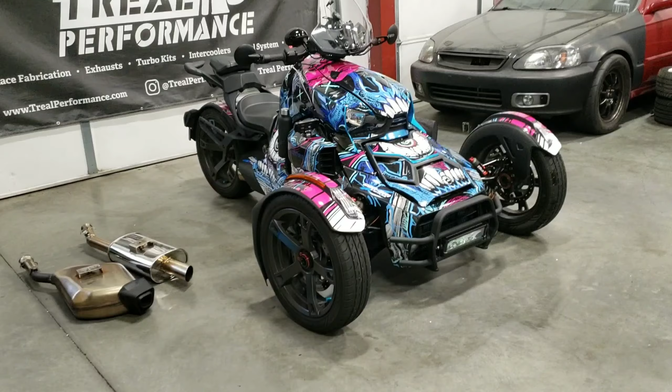We are here with the Can-Am Ryker, and we have test results for the exhaust and intake system. I'll let Joe talk about the dyno results and what all we had to do to get it on the dyno.

Hey guys, so these things were quite a bit of work to get on the dyno, to figure out how to actually make power with it, because the way the factory ECU works, it has a lot of traction control and ABS, so as soon as you would put it on a roller, even with it being in sport mode with the traction control off, it would still freak out and throw codes and go into limp mode. We had to do quite a bit to get that worked out and figure out how to get around that. We spent almost 2 weeks straight trying to get it figured out. Finally got it figured out by having the computer hooked up with the BUDS system, and then we were able to get it to work.

From there, we started doing a back-to-back test, pretty much all within about 4 hours once we got it figured out how to get it on the dyno and be able to do a pull. Started completely stock tuning, then swapped out to our exhaust, and then did an install with our intake on it and got all the back-to-back numbers. The only one we didn't do was stock exhaust with the intake, but the gain should be the same as doing the exhaust with intake.

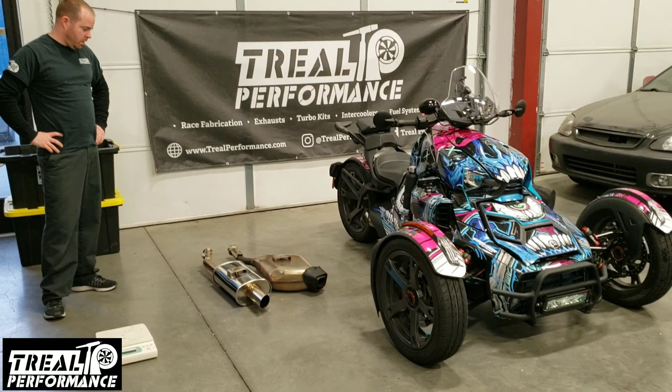I'll let Joe take it over and talk about the weight differences between our exhaust versus stock exhaust, and the power difference versus stock exhaust as well, with that intake on there too.

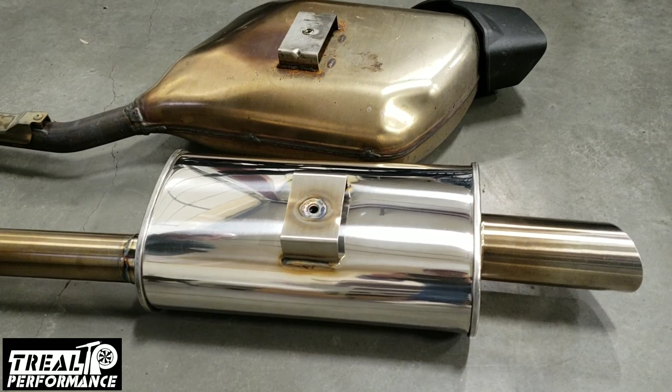The other thing I wanted to show you guys is the quality difference from ours to the factory one. This one is still our prototype, it's used because we put it on there to do some testing. But everything is TIG welded, all stainless, versus these big nasty MIG welds that can rust and look bad compared to our welds here, and even on here, everything looks pretty nice and pretty.

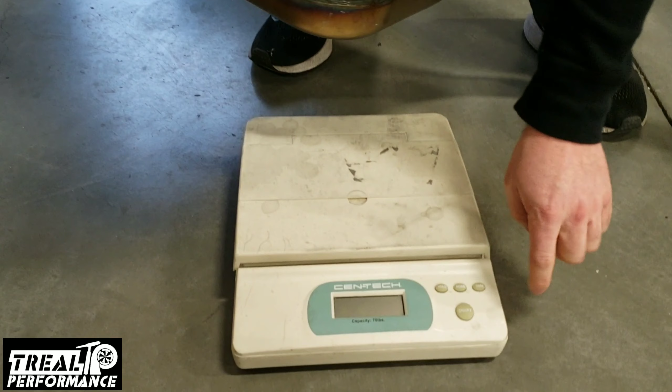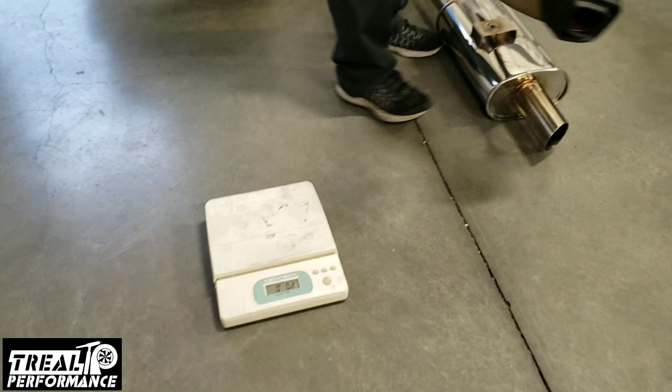From there, we'll get to the weight difference. Start with the factory one. I gotta turn on the scale, zero it out. All right, so we're at 0. So we're at 23, 1... yep, on that one. So 23 pounds.

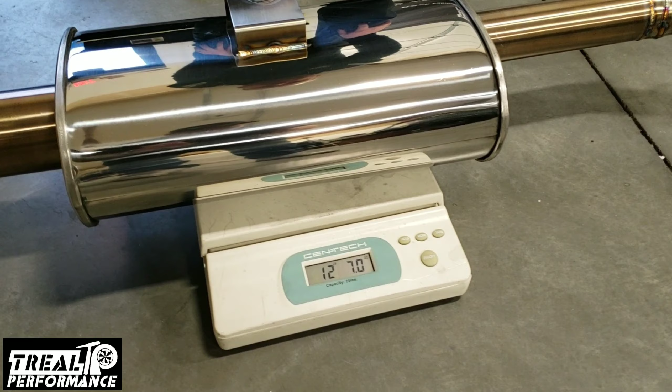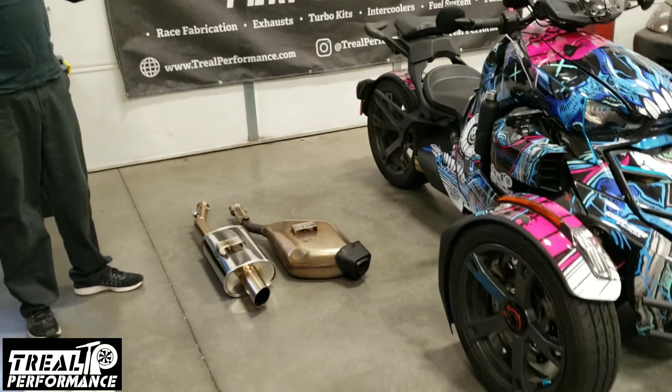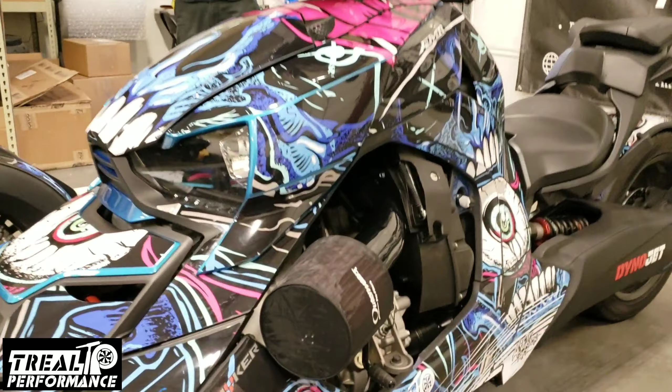And the new Treal Performance exhaust, we're at 12 pounds. So 11... yeah, so we're an 11-pound difference. If you take the weight difference also with our intake on there, the factory whole intake system is 6 pounds, our intake system is 2 pounds, so it's another 4-pound difference. Between the two, we're 15 pounds, which would be roughly a 2.5% reduction in weight. Then also, the power difference with the intake and exhaust was 13.8 horsepower, which is like a 21% power increase, which is pretty good off of two mods.

Now we do have video footage of the bike on the dyno, so we can show that.

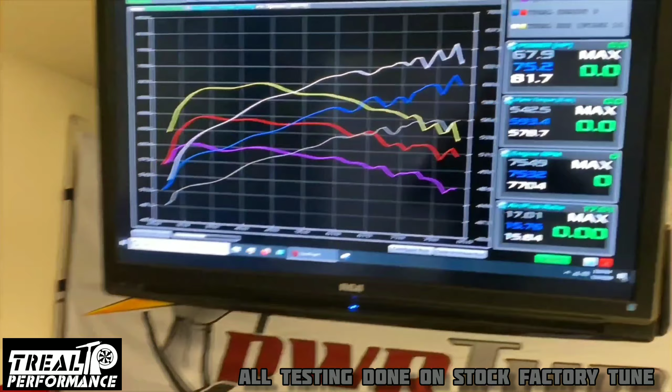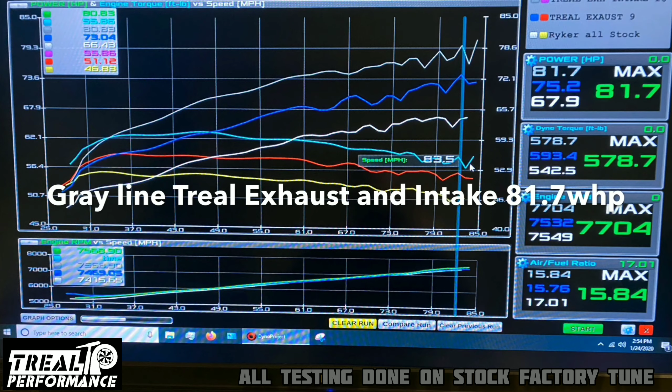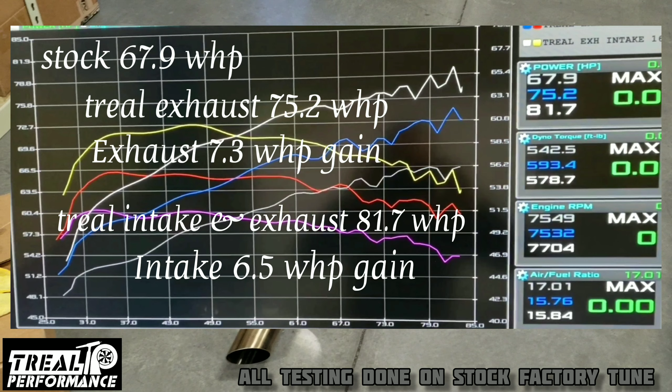Okay, so here's the dyno numbers. It goes over them pretty quickly in this video clip, so I've added a second video clip. Stock, the bike made 67.9 horsepower to the wheels. We added the exhaust, it made 75.2 horsepower, that's a 7.3 horsepower gain. The intake and exhaust made 81.7 horsepower. The intake added us 6.5 wheel horsepower, that's a 13.8 horsepower gain to the back tire.

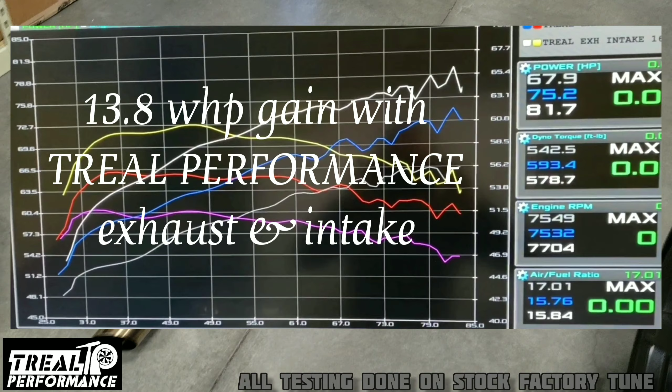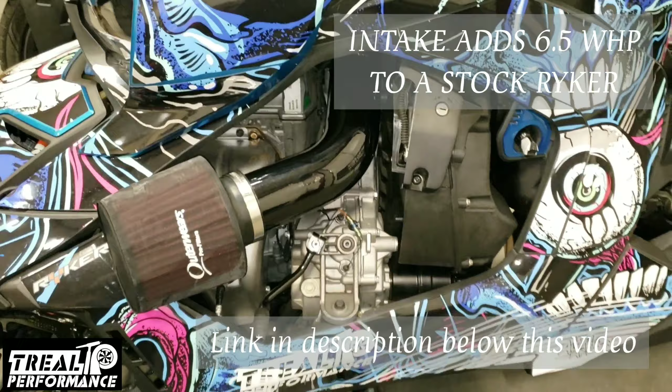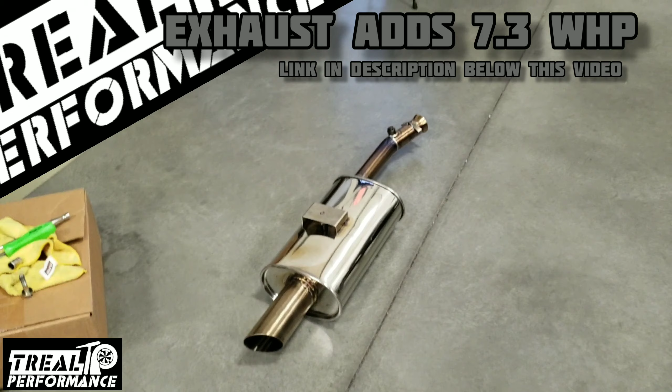This intake system can be purchased on the Treal Performance website for $295. I'll let you take a look at the intake system here. The exhaust system can be purchased for $625. This is a high performance muffler, not a dirt bike exhaust modified to fit the Ryker. This thing has a deep rumble to it, but it is not extremely loud and high pitch. Everything is TIG welded in-house at Treal Performance's shop here in Vancouver, Washington.

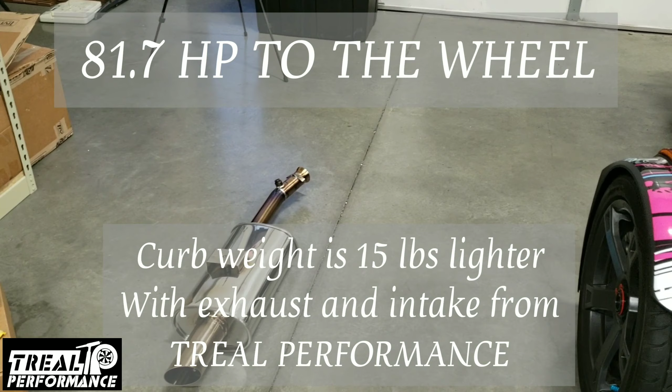Okay, so now I'm going to let you hear some sound clips of the different exhaust setups compared to stock. Ready?